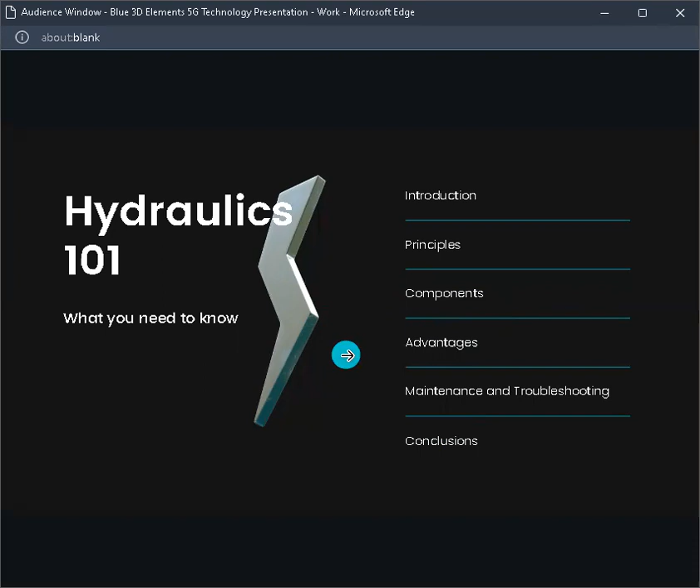Before I proceed, let me give you an outline on how I will discuss my understanding about hydraulics. First is the introduction, where I will briefly explain what hydraulics is. Next is the principles, where I will give two main principles used in hydraulic systems. Next is the components of hydraulics, the parts of hydraulics. Next is advantages and its application to this field. Next is maintenance and troubleshooting. Lastly, the conclusion. So let's proceed.

Let's start with the introduction. So what is hydraulics? Hydraulics is a field of engineering that involves the study of fluids in motion and the use of pressurized fluids to generate, transmit, and control power. Actually, in a hydraulic system, the fluid being referred to is typically oil or water.

I thought before that it was only oil, but I didn't know that water also works here. It is used to transmit power from one point to another. The fluid is pressurized by a pump so that it can perform work on mechanical systems.

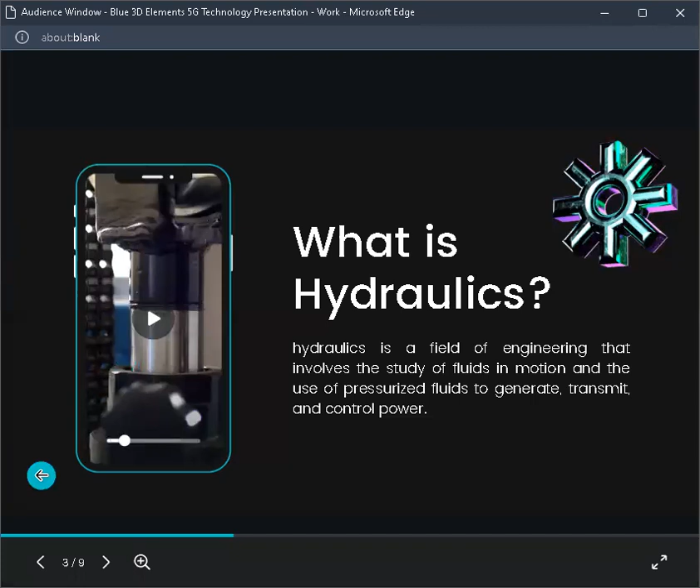So that's it. Next, let's proceed to the principles of hydraulics. We have the principle of continuity and Pascal's principle. Actually, as far as I know, Pascal's principle is the only one I found in the definitions or the links I researched.

But based on the definition of continuity, it states that the mass flow rate of a fluid must remain constant throughout the system as long as there are no leaks or additional fluids. This principle is crucial to the design of hydraulic systems as it ensures that the fluid will flow consistently throughout the system, regardless of changes in pipe size or shape.

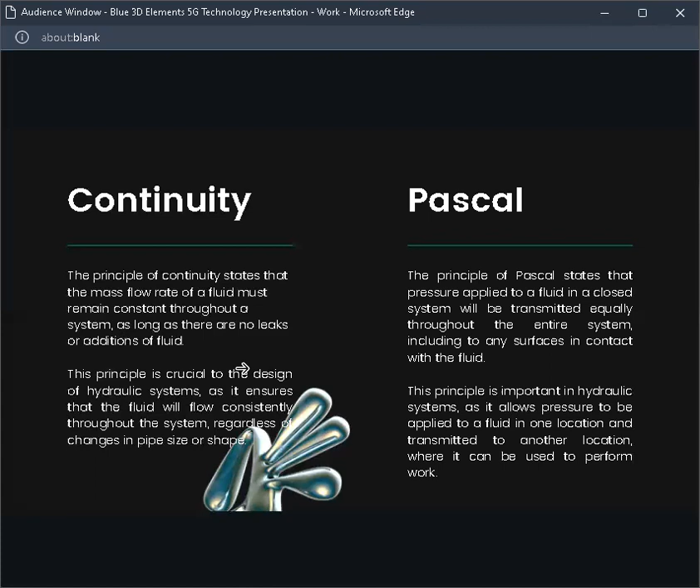First, the pump is used to generate pressure by forcing fluid through the system. Next is the reservoir, a container that holds the hydraulic fluid. Next is the valves, used to control the flow and pressure of the fluid.

The actuators are used to convert the pressure of the fluid into mechanical work. Next are the cylinders, used to convert the pressure of the fluid into linear motion.

Hoses and fittings. Hoses are used to transport the fluid between the different components of the system, while they are connected to the various components of the system using fittings. Lastly, the filters filter the fluid.

So actually, all of these are the basic components of a hydraulic system. But it depends on what kind of system or what the requirements are for that system. But these are the basic ones that are needed. Let's proceed.

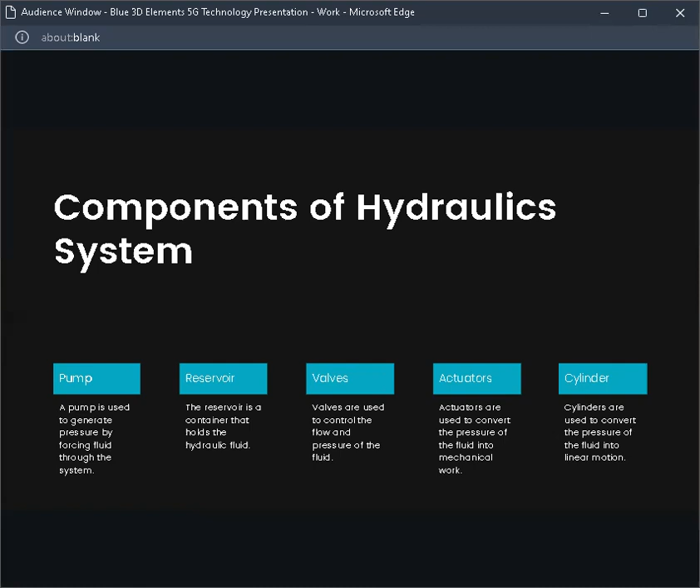So, the advantages of a hydraulic system. Here are some advantages: high power density, precise control, smooth operation, ability to handle high loads, versatility, and resistance to shock and vibration. These are not all the advantages of a hydraulic system.

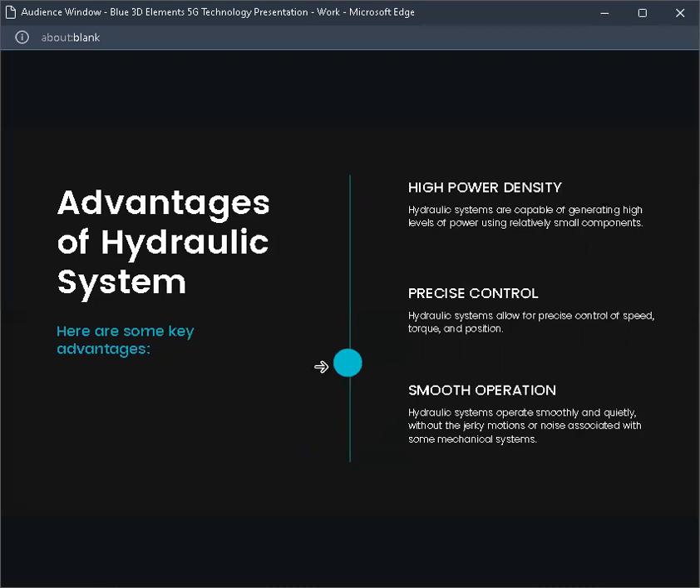Next is proper maintenance and troubleshooting. This was actually discussed already, so I noted it down earlier. Preventing wear and tear: hydraulic systems contain several moving parts such as pumps and cylinders that can wear out over time.

Next is reducing the risk of failure. A poorly maintained hydraulic system is at greater risk of failure, which can result in costly downtime, repairs, and replacements.

Ensuring efficient operation. A hydraulic system that is not properly maintained can experience reduced efficiency and performance, which can result in increased energy consumption and decreased productivity.

Next is maintaining safety. A hydraulic system that is not properly maintained can be a safety hazard. So there are only 4 of them.

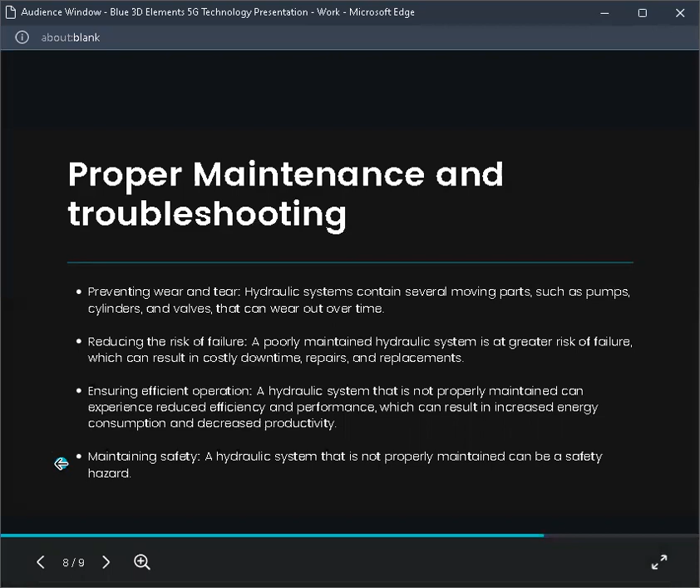But that's not part of it. As I said, to summarize, hydraulics is a fundamental branch of engineering that plays a vital role in the design and operation of a wide range of machines and systems. Its importance in engineering is underscored by its ability to provide high power density, precise control, smooth operation, versatility, and resistance to shock and vibration, making it a valuable tool for engineers across many industries.